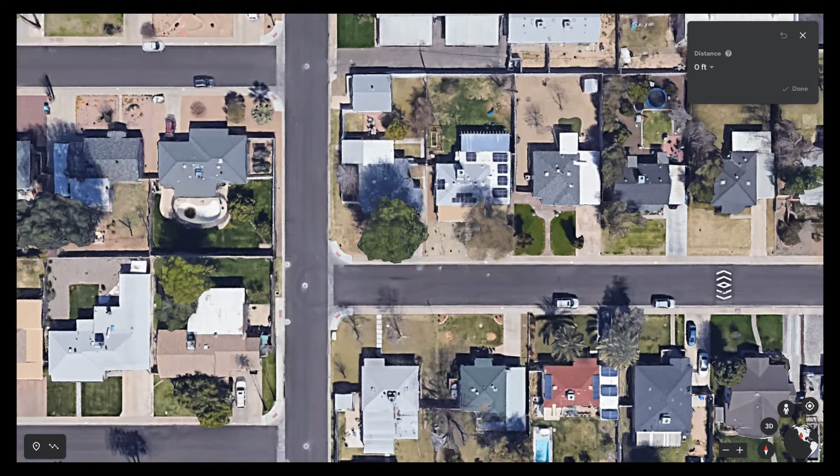We'll put that there. On the west side, it's a good 70, 80 feet as you go across that street. And to that north, we zoom up a little bit. You're still 40 to 50 feet before you hit where someone actually lives. So there's actually a kind of a unique advantage to my property in that my music room is detached from the house, and it's actually a fair distance from everyone.

I've also made an effort to not play too late or not play too early. And there used to be a renter in this property who I had a conversation with: Hey, I'm a drummer, and I like to play. If you ever have a problem, give me a call. And I had that same conversation with the new owners that moved in maybe about 2 years ago.

And I've never had a complaint about this, but I've also been a little self-conscious. And I have kind of made my own rule that I don't play before noon and I don't play after 7 p.m. And that's worked out for the last 4 years or so. But when I was looking at my space, there were a couple of very basic improvements that I thought would help improve the sort of acoustic control as well as the use of the space.

And then, as I started looking into it and doing the research, I thought, there's an opportunity here to make some significant improvements that would make it a lot easier to possibly play outside of some of those hours I had pre-established, as well as just future-proof any issues.

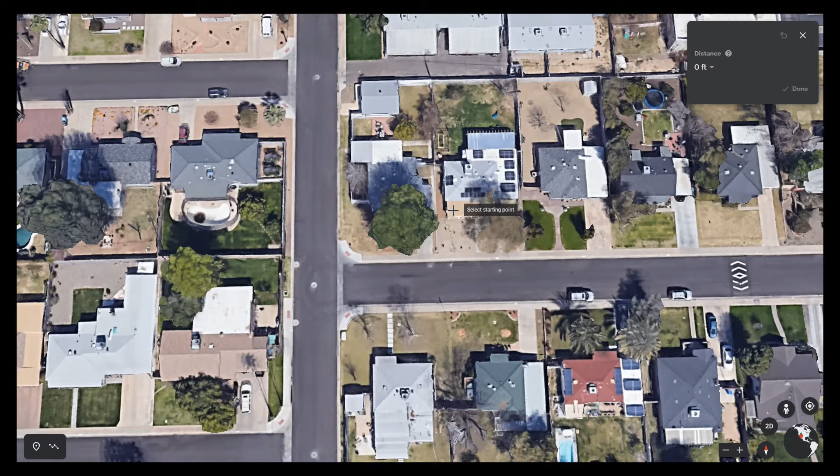So what I would encourage you to do with this is, first of all, do your research. So I'll show you a couple of books and resources that I've used in planning my project. One here is a book, How to Build a Small Budget Recording Studio from Scratch by Mike Shea and F. Alton Everest. This one had a lot of interesting information, a lot more about sort of the acoustic engineering and some of the principles. It has also a lot of information about acoustic treatment and some basic information about acoustic isolation or soundproofing.

But another resource that I thought was a little bit more pragmatic and a little bit more focused on, okay, how would I actually build something, or what are the materials that really make a difference? Or as Rod Gervais points out in his book, Home Recording Studio: Build It Like the Pros, is it the right material and is it in the right location? And this was kind of an interesting resource because it covers the whole construction set of trades, whether it's carpentry and framing, electrical, HVAC, and some of those other pieces.

And he also gets into acoustic treatment, which is, again, treating a space to improve sound inside of the space. But one of the things that I think Rod brings to the table is really that construction background. There's a lot of helpful diagrams and drawings and topics there that are, again, really pragmatic into how to physically do something.

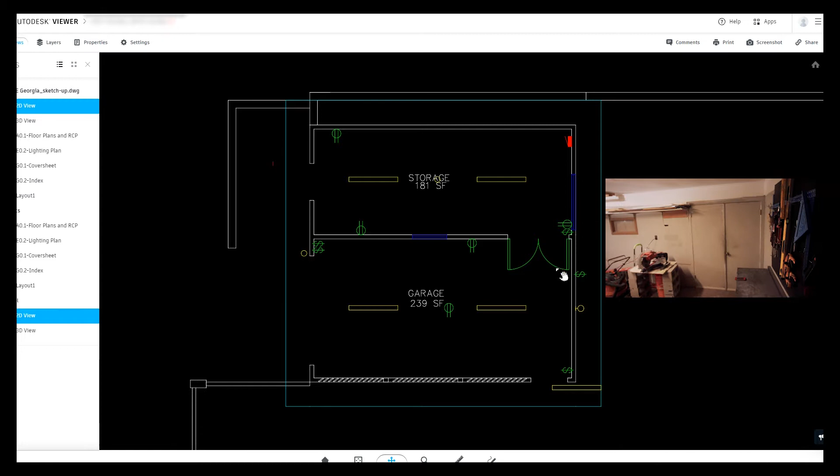And so let's talk about my garage. So we talked about my music space. My music space is here inside of this garage. It's about 180 square feet. It's very simple. You can come through here to get into the garage area. There's a set of double doors that bring you into this room. There's a window in the east wall. There's a small window in the south wall, and there's an exterior door in the west wall that takes you out into this porch area.

Inside, it's very simple. It's just a box. We've got a few electrical outlets. The electrical distribution board for the garage is located in this space. And we have some surface-mounted lighting in here. Very simple. You've seen it in a lot of my videos. But it's nice and, again, conveniently located away from the house and relatively distant from the neighbors.

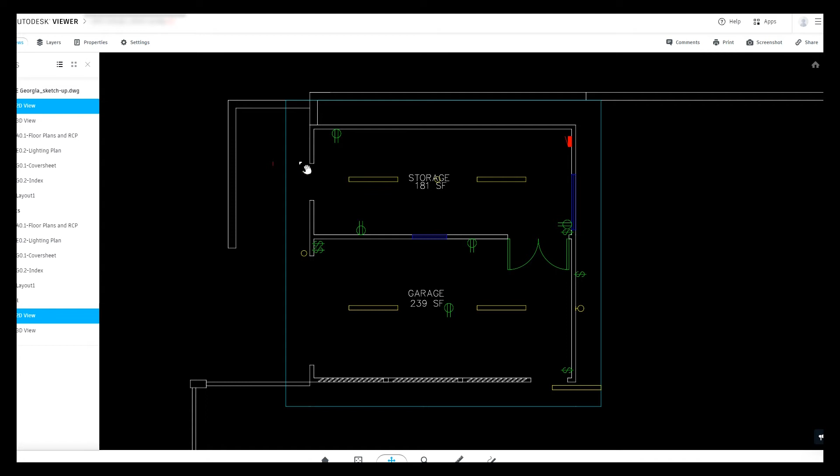As you come through this space, you come into the garage area that has a traditional roll-up door, some very basic lighting. It used to have an open slat construction on the south side. I did a project last summer to frame this all in. It's got sheetrock and some storage here, so that helped a little bit on that south side. So this is really where we're starting with in terms of the work. So in terms of planning, looking at your space, what do you have? You can start to draw it out and test ideas and see what makes sense to you.

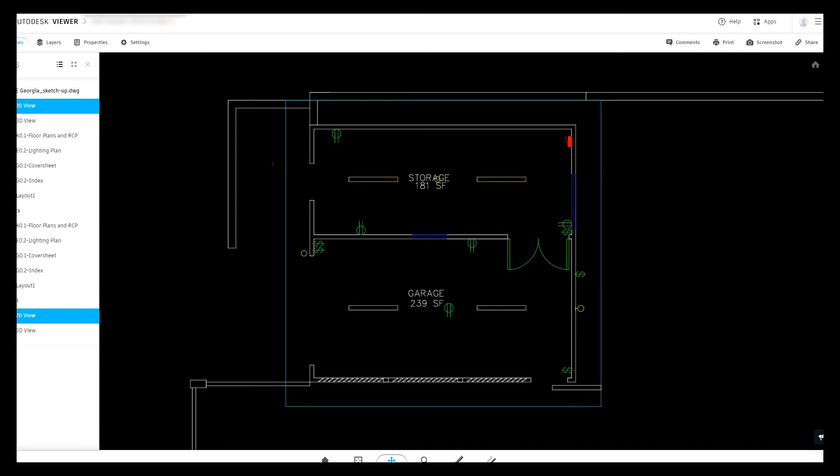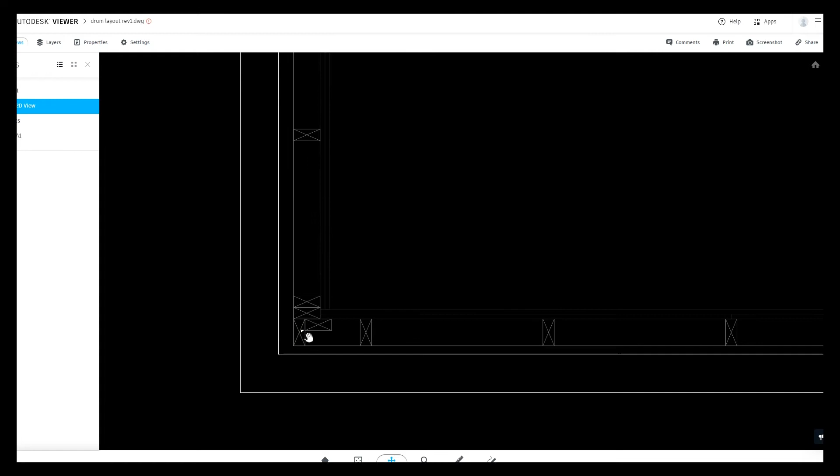So this other drawing here, same application, AutoCAD, again just working in 2D, and we're just doing line drawings or sketches. So here I can start to actually build it on paper before I try to build it in real life. The concept I wanted to do was a room within a room. And when you start looking at that, you think, okay, how would I actually do that? If I have the exterior wall, which is represented by these two lines, what is the impact of framing up a wall inside of that exterior wall? How does it impact my floor space?

Once I put in studs and gypsum wallboard finish, and I try to keep a certain distance separation from the other wall, on paper you're able to start planning out what is the actual impact and how's this going to work. And here you can see what I've actually done is, again, built it on paper first. So I'm laying out studs. There are a couple of options you can go with for stud spacing. These are for the walls.

Common spacings you'll see are 16-inch on center, 24-inch on center, and there's even 19.2-inch on center, which I've never seen. Thinking about openings, where would the door go? What sort of framing does the door need? What clearances does it need from different things, and how does that impact your space? This is a good 2D way to start thinking about it. Now, a couple things. One is not everybody has access to AutoCAD, although there are some freeware versions, but almost everybody has access to pen and paper.

Even if you don't want to do it on a computer, you can look at laying things out and testing ideas, although that can be time consuming. But one tool I would highly recommend for everyone to look into is SketchUp.

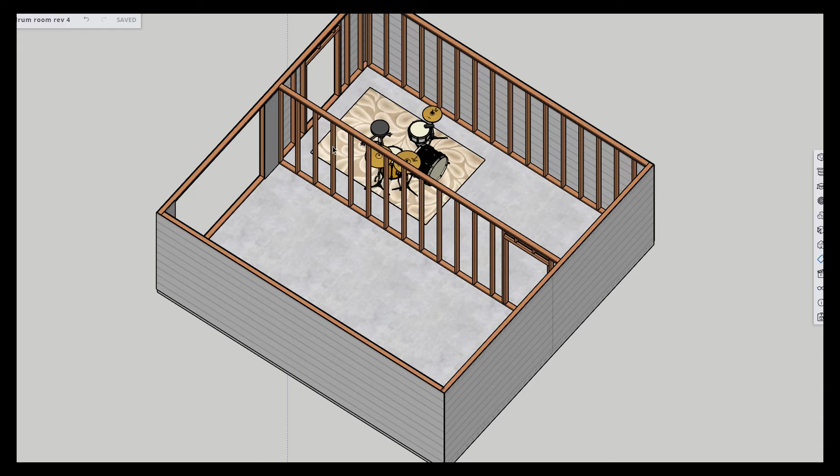SketchUp is very similar to AutoCAD in that it allows you to draw things, but this is essentially a 3D modeling software, and it's incredibly easy to use and very intuitive. Now, there is a free version you can get online. SketchUp has moved to sort of a paid version that you can access online, and that's what I have. But the free version is very similar to the paid version, and I think most basic projects could probably get tested and modeled using the free version.

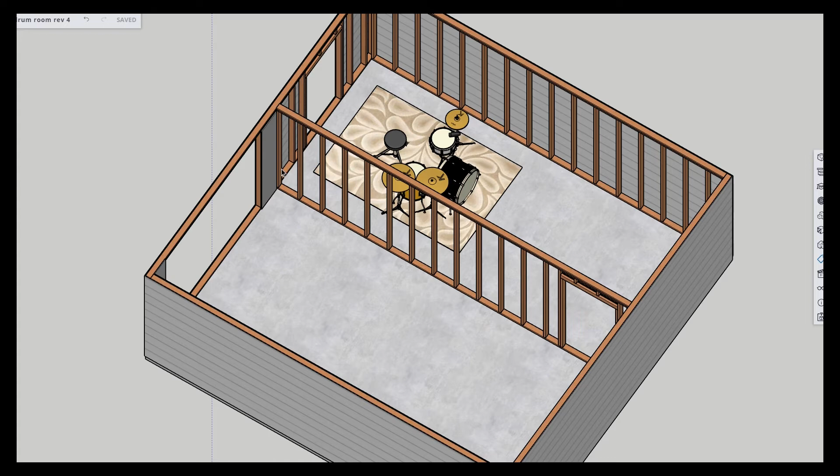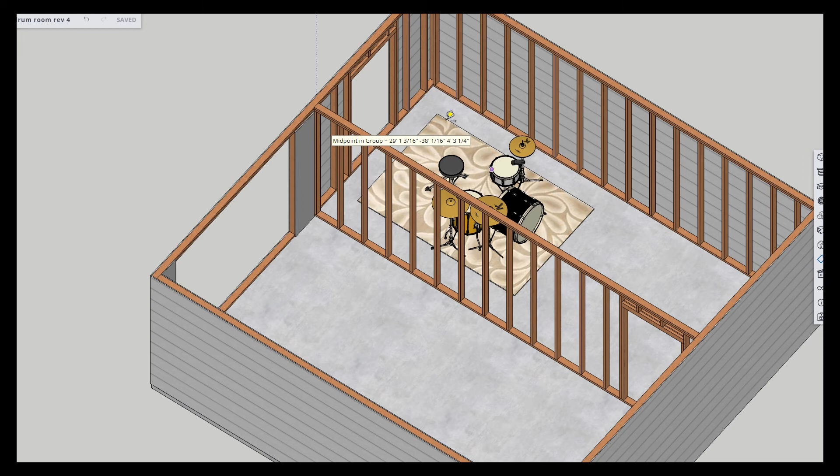But what you have here is that same concept of AutoCAD in the sense I'm doing drawings, but I'm actually doing this natively in 3D. This is a model that I can move around, I can test, I can measure different distances between elements, I can check things. There are ways to, again, build this on paper, or here, build a model before you get out to site.

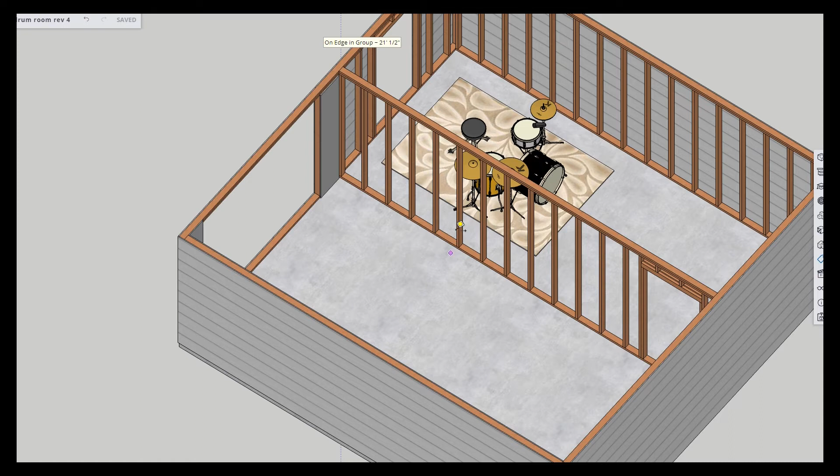And I've taken time to actually do just that, in the sense of, this is a stud, this is where it goes, this is the distance it's going to need to go from the next stud. Where's the wall plate, bottom plate? How do the top plates sit? How do the two top plates mate with each other? Those sort of things. And what that does is it allows you to test ideas and to see what something's going to look like before it happens.

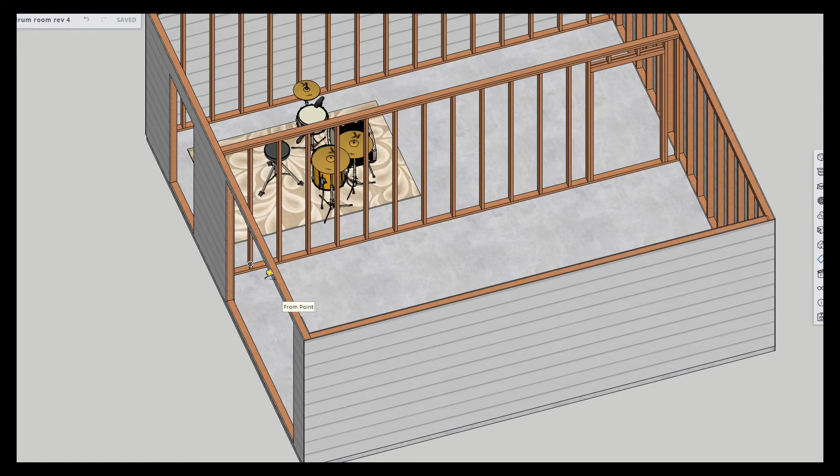Now, what this is representing in this model here is kind of what I have already. So I didn't model everything. I didn't bother modeling the existing exterior door where you walk into the garage. This is the garage door, roll-up door that's here. This is that existing exterior door in the west wall. I didn't bother modeling the windows because I'm actually going to be removing those. So I'm starting with this. This is kind of what I have.

I threw a drum set. Look at that. That's pretty cool, right?

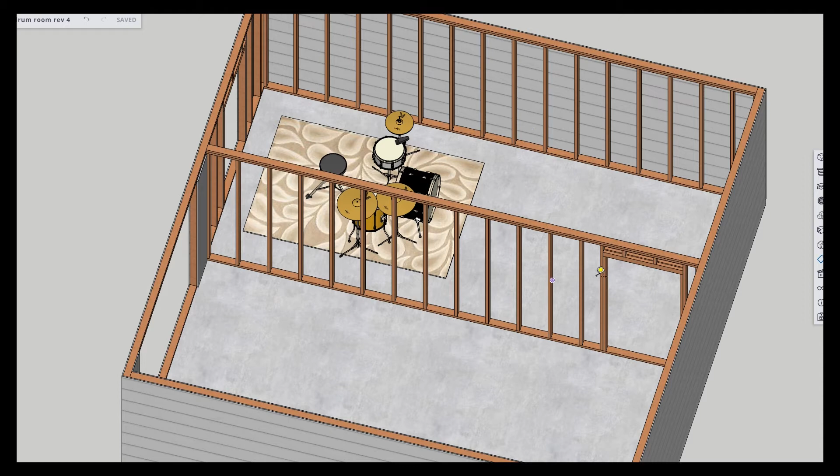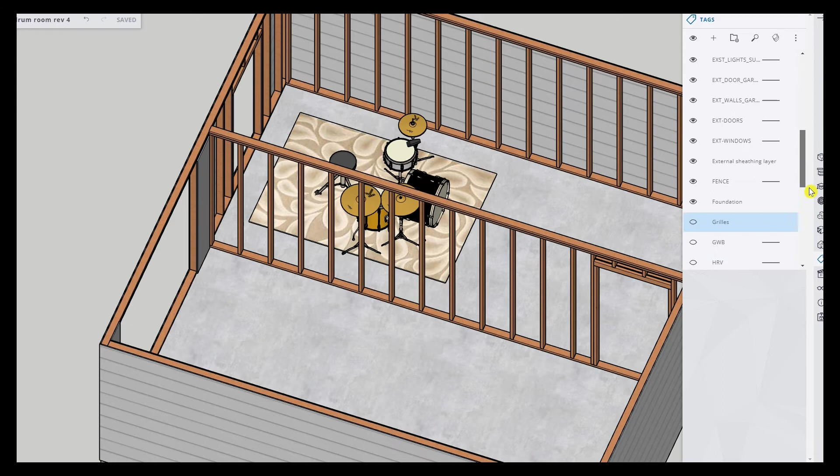I threw a drum set right in the middle there just to kind of give you some concept of space. So this is what I'm starting with. And again, I'm a very visual person. I love the fact this is very visual, very easy to look at, to test, and actually using this software is super simple, okay? So if I'm starting with this, let's say, okay, well, that whole idea of building a room within a room, what is that going to look like? So let me pull up, so that's what I've done.

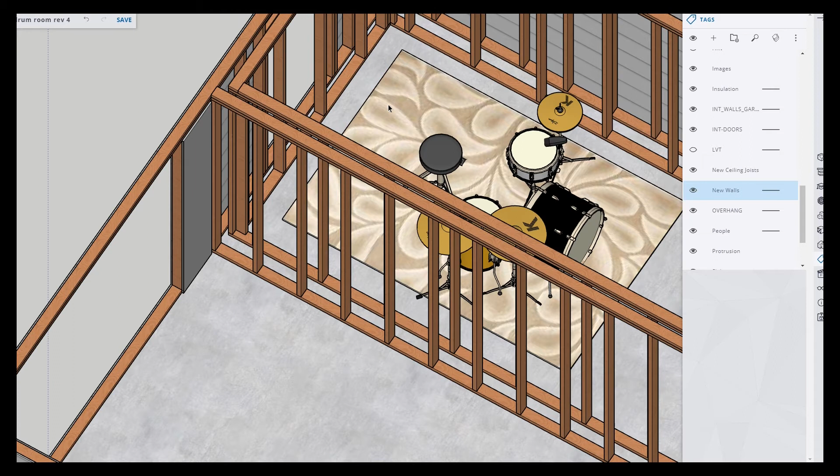So here in my SketchUp model, I've gone in and I've framed every member of my new wall. So this is an existing wall that comes through here. And this is where we're going to be building this second wall, which is to help isolate the music space from the rest of the building. And the existing framing is 16-inch on center, which is pretty common. This is a load-bearing partition. The ceiling joists rest on this wall here.

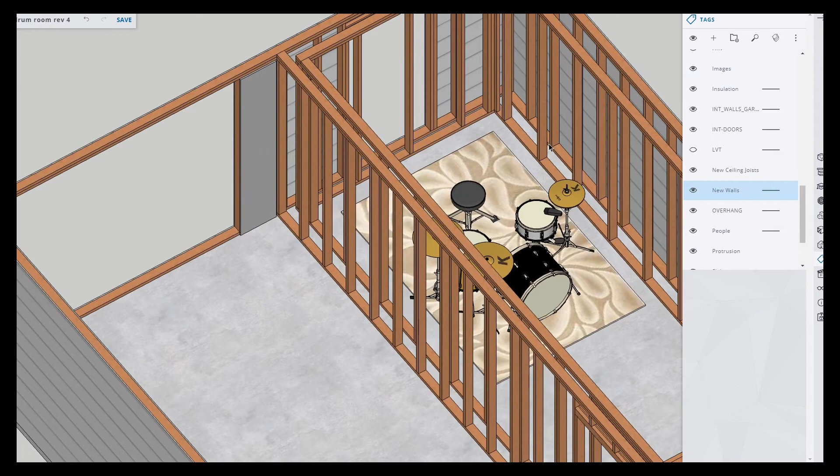My new wall is going to be framed at 24-inch on center. That's done purposefully for a couple things: it's less framing for cost, and also in terms of acoustic response, less framing provides better isolation. Because there's more of an air gap or insulation that is helping prevent sound migrating from this wall construction through this gap to the next wall construction. Each one of these pieces of framing is essentially a short circuit where that sound can excite the mass and travel through that other mass.

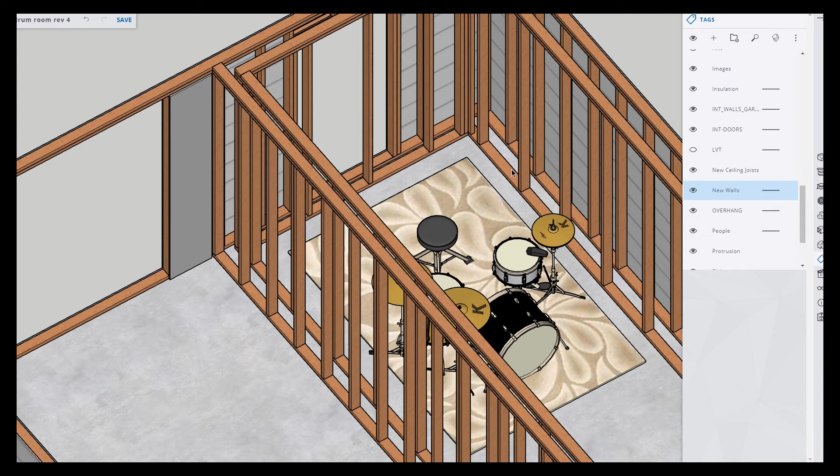And really this whole concept of the room within a room is sort of the mass spring mass concept. You've got to have a mass wall, a spring, which is this airspace in between, which also has insulation inside these stud bays, and then a mass on the outside. And really that's kind of the key, and what you'll see in Rod's book, and you also see through a lot of tutorials. Don't be fooled by products that say they'll magically reduce noise in terms of acoustic control. There's a big difference between control and treatment, but in terms of acoustic control or soundproofing, mass is literally almost the one thing that will do it.

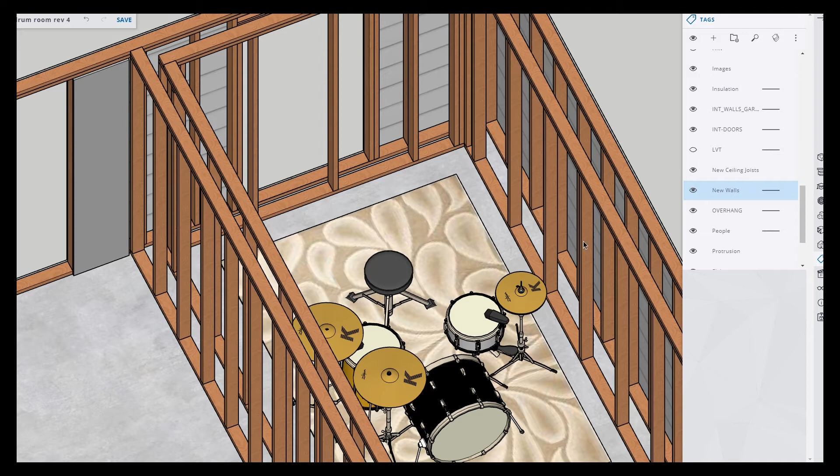You can't magically put egg crates on this wall and expect that you're going to prevent sound from traveling through this construction. So again, in terms of planning here, I've built literally every 2x4, and I can build it in this model before I ever start on site.

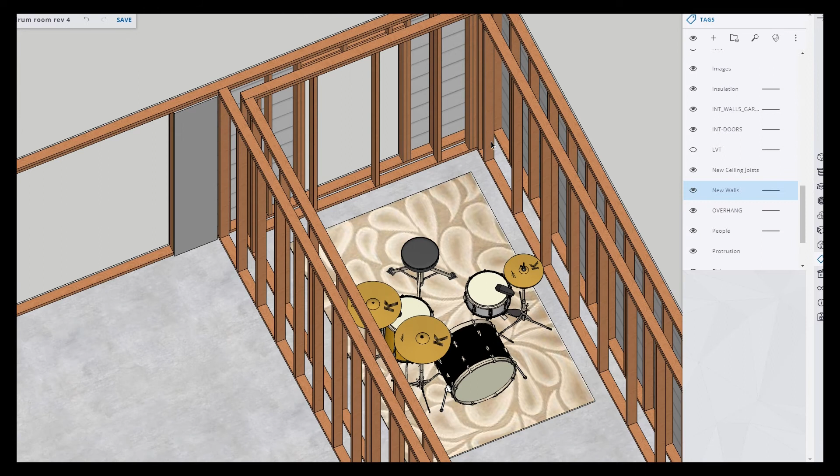So we talked about a room within a room. We have walls framed up here, 24-inch on center, and they are on the existing concrete slab. Now, one thing I did look at a long time ago was some concepts where I would build a floating floor.

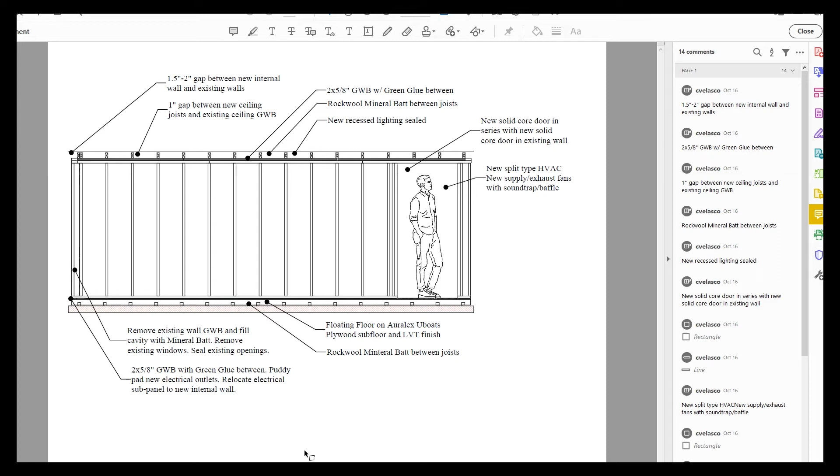What I have here is my original concept, and I'll just show you this in 2D. Again, I used AutoCAD to draw this. My idea is very similar to my current design, but the difference is that in this design I actually added a floating floor, and that floating floor would be another way to help isolate the room within a room from the slab. And I'll show you another set of images that make this a little bit easier to follow.

This is my original concept, and you start with the current space that we have, and this is my idea for the floating floor. I looked at a couple of different constructions, I watched a lot of YouTube videos, I read some books, and essentially this would have been a framed floor that would sit on rubber isolators. This specifically was going to be a product by Auralex called U-Boats, but essentially they provide an isolation for that floor framing from the existing slab.

And then inside of that I would put rock wool insulation, with the purpose of helping isolate the room within a room from the existing slab. Now this is a lot of construction, a lot of materials and a lot of cost, especially these small isolators. There's a couple different products and approaches, but these specific ones weren't cheap, $3 or $4 each.

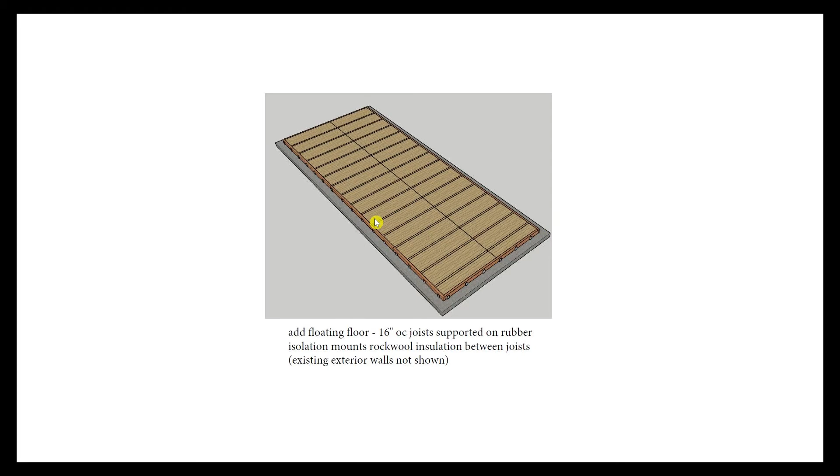So one big thing was in Rod's book, it really talked about floating floors, and to sum up his conversation, you will never get enough mass for it to be effective, especially in terms of lightweight framing. And if it's a slab on grade, this doesn't make any sense. There's not enough mass, and in some situations this can actually make it worse, because you essentially create almost like a drum, and there's some complications here.

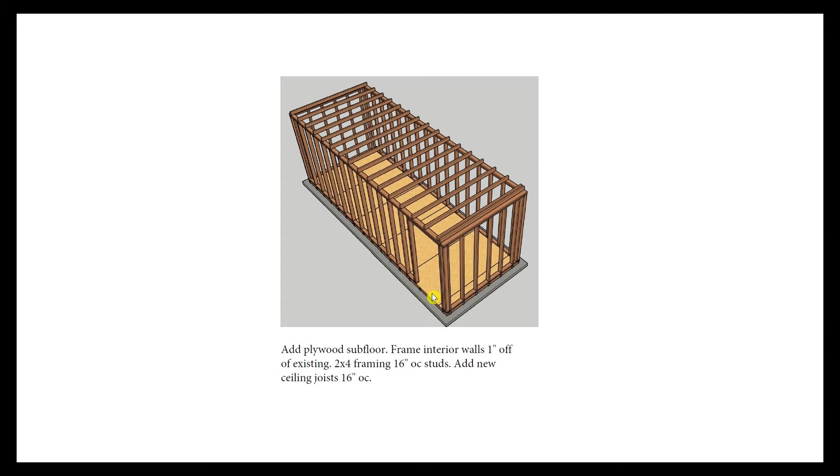So again, going back to my original idea, you'd have that floating floor, you'd frame up your walls. I even looked at doing 16-inch on center internal framing, and you would have your floating floor, you'd put your subfloor on top of that, and then whatever floor finish you want. I was going to put an LVT product, and I'll leave that there.

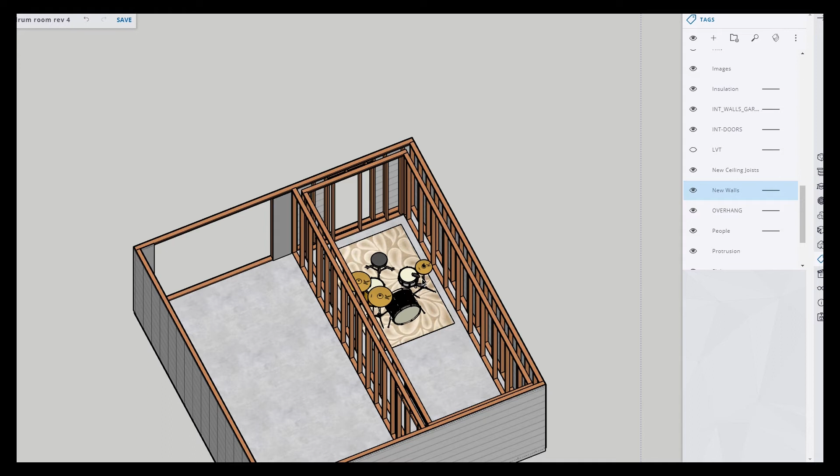So that's one big difference between my original set of ideas and my current set of ideas, especially influenced by Rod Gervais's book and some other research I've done. I think YouTube is a great resource, but it's also full of homebrew and maybe not completely valid approaches, and some great ideas, but seeing it in print by an experienced studio designer is a lot more reassuring than someone's YouTube video. And I understand the irony in you watching this video.

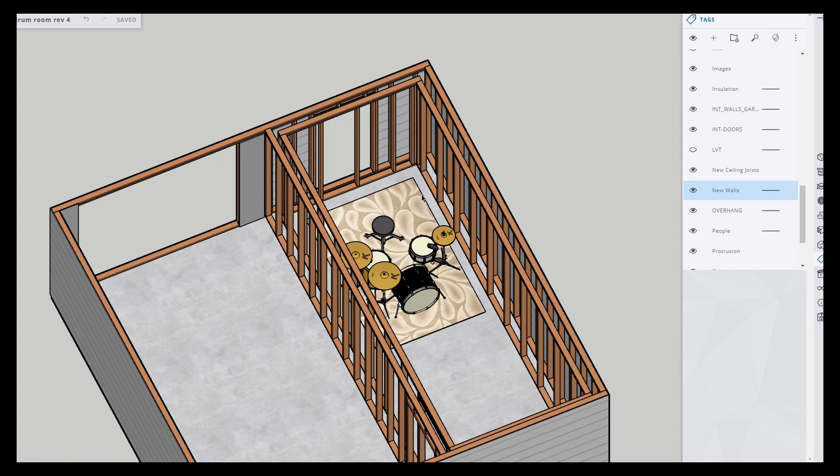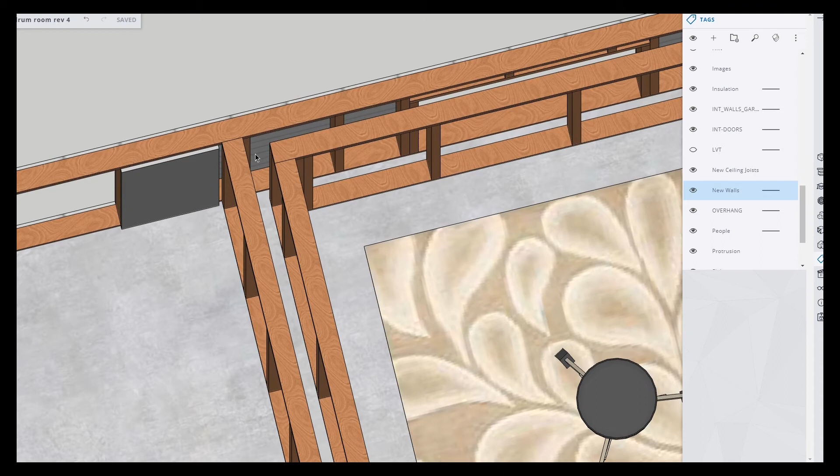So again, I just want to present these ideas. That's a long introduction to say my intent is for the room within a room to be installed on the existing slab. Okay. So now we've built the walls, 24-inch on center. There's a gap. It varies, but it's between 1 inch and 2.5 inch. Obviously, there's no finish shown on anything right now, so it's about that. But these are physically separated from each other.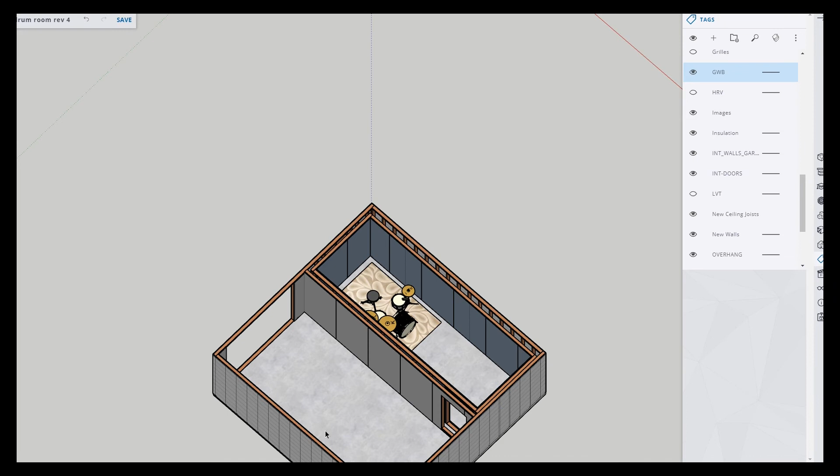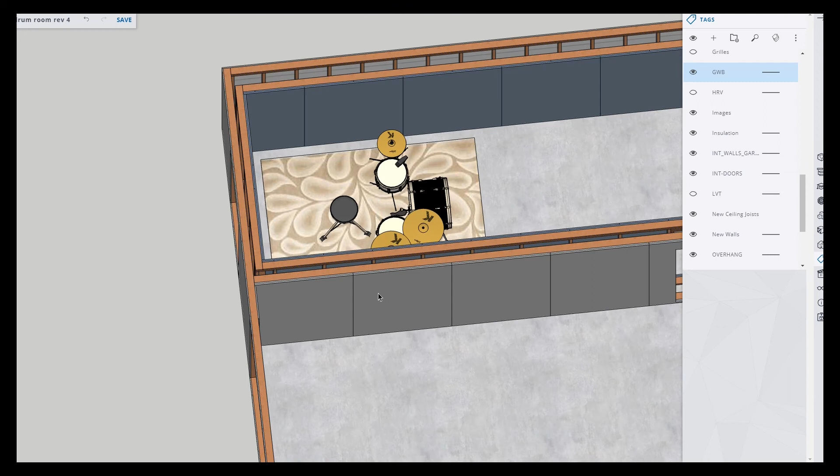So I'm going to start with the sheetrock here while we're still on the walls. Inside the garage, I'm actually going to demo, because I replaced this wall essentially, this sheetrock here, clean this up, and remove the window there because I want to add insulation. There's no insulation in this wall right now, so that comes off, and I'll be replacing it with 2 layers of 5/8 inch drywall. And on this garage side, it's just going to be that. I'll get to the inside of the music room in a sec.

And I'm going to replace that same sheeting on this wall. By this point I would have replaced the sheeting on 3 out of the 4 walls, and there's not much wall on this side because of the garage.

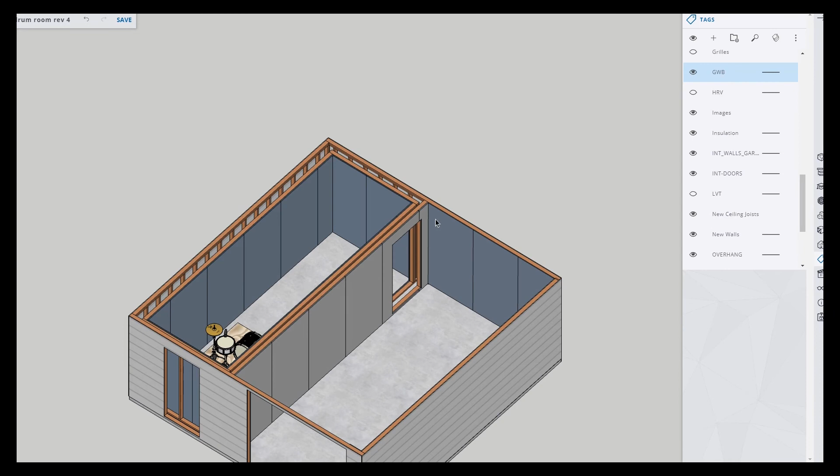So I thought, you know, I want to clean this up, and there's a couple things I want to do, clean up the electrical and stuff. So I'm actually going to pull this sheetrock off and do this. But this is just going to be a single sheet over here. And I don't even think I'm going to insulate this. So, okay, that's these existing walls and how we're going to do a little bit of modifications to it.

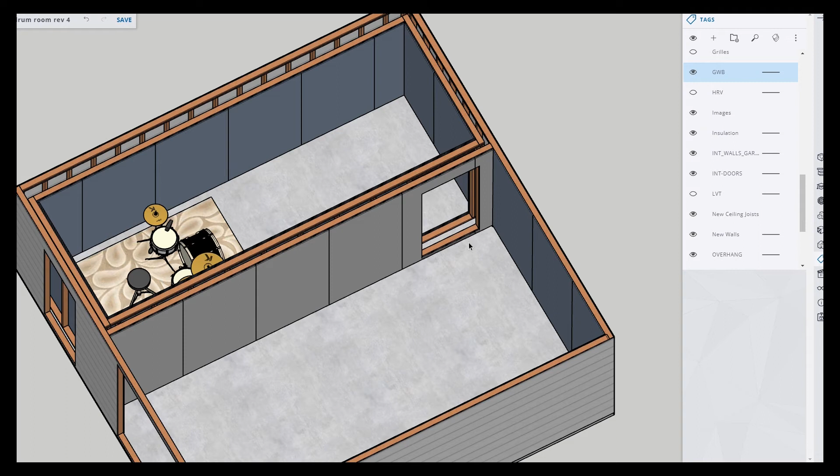One of the things also is that in terms of that double door, what you'll find, and you'll see in the books and in a lot of tutorials, is obviously doors and windows are real leaky sources in terms of noise control. So although the double door concept is beneficial for moving large things in and out of this room, I just don't think it's worth it. So I'm going to frame it in for a single door on the existing wall. And you'll see it'll be a door here.

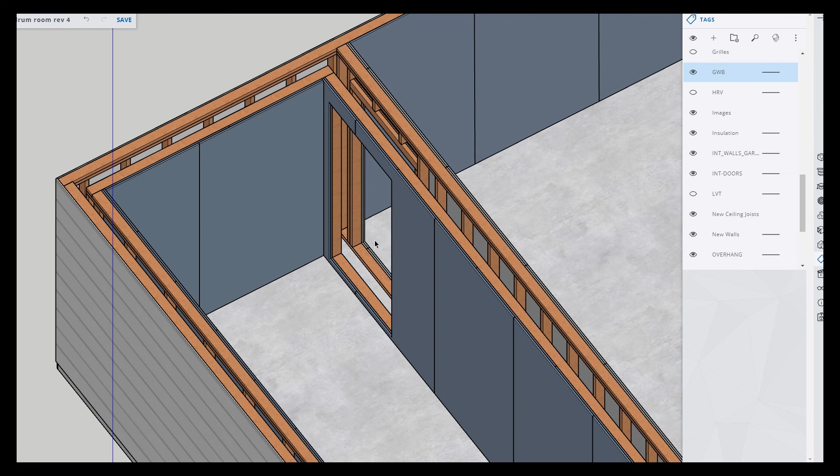On the inside, in the internal room within a room, there will be another door. So you're going to have a double door setup. And you'll see that throughout the resources, you'll see that all over YouTube. It's quite common with room within a room. Really in Rod's book, there's two big approaches. You could have one massive door, or you could have the two separate doors. And there's some details there.

But inside here, we're going to have the new framed wall, and I haven't modeled it, but I'll talk about insulation here in a second. On the finish here, you're going to have two layers of 5/8 inch drywall. The seams are not going to be lined up with each other. As you can see, this detail here is modeling where the seams are, and they're staggered. This will all be acoustically sealed using a purposeful sealant throughout, and then two layers of 5/8 inch drywall, and in between those layers I'm going to put the green glue.

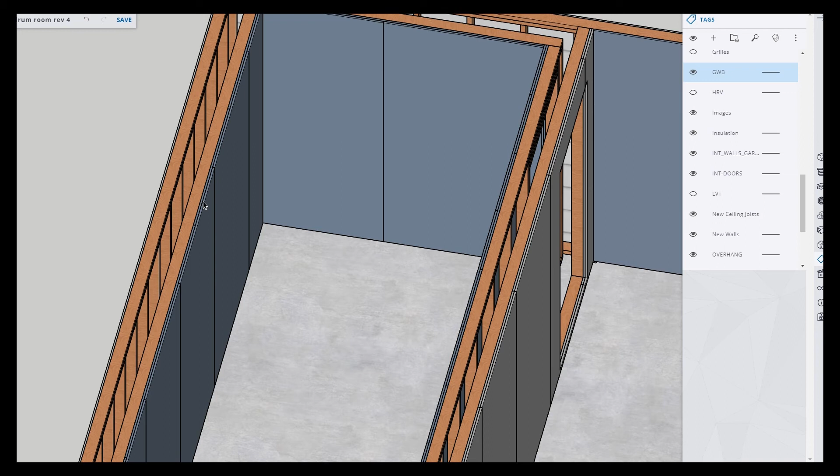And green glue, you're going to see tons of videos and resources on that. That's essentially a compound that never fully dries. It is intended as a dampening material. So the idea is that as sound waves strike this construction material, they vibrate this material. That physical vibration gets dampened by the green glue that's in between these two sheets of drywall. That mechanical energy is converted into thermal energy, which is absorbed by the wall. And again, it's a process to help prevent sound from escaping this construction.

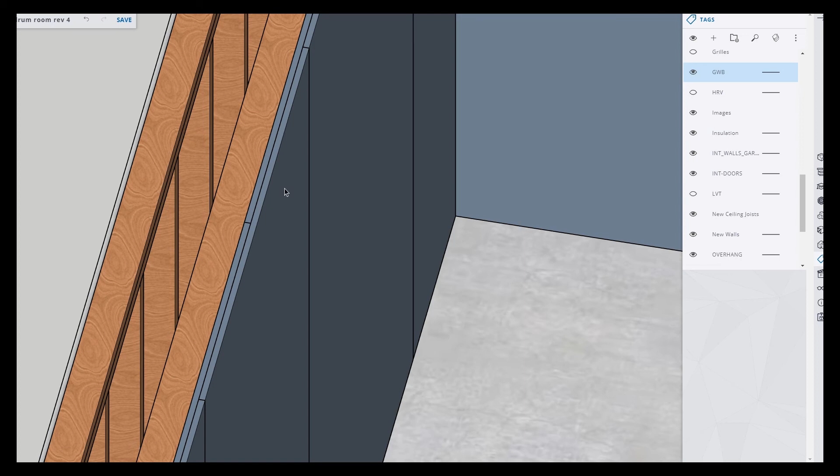Green glue is not cheap, so I've been looking into that and reading some more resources. But essentially you have a sheet of drywall, green glue, another sheet of drywall, your framing, and then in this stud bay, let me turn this off here a second. In this stud bay here, this is the existing, air gap, new. In the existing, we're going to put up an R15 mineral wool product. Then you're going to have an air gap, and then we're going to have the Rockwool Safe'n'Sound batt inside the stud bays in the new construction.

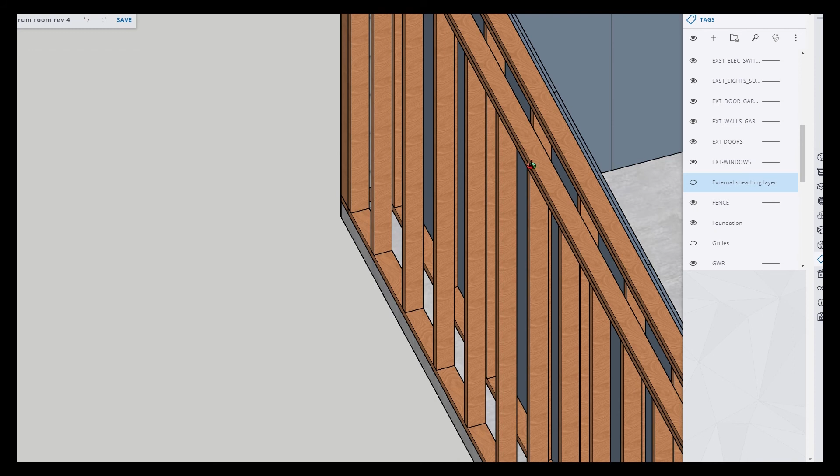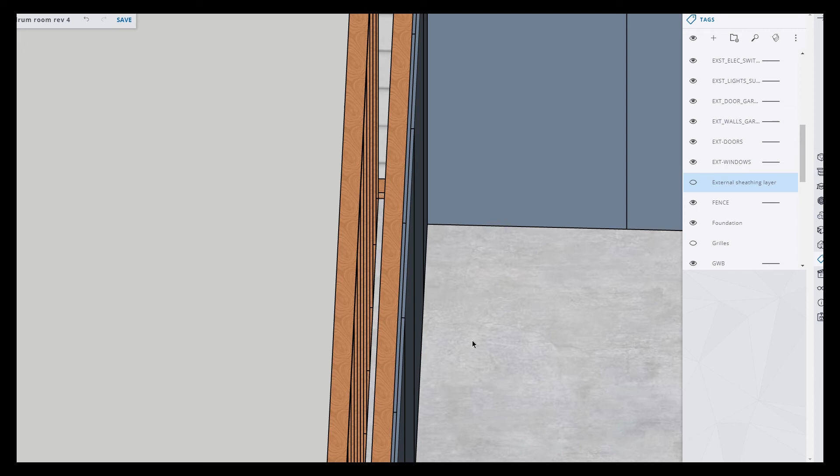So you have exterior cladding, which will take effort to go through and seal up as best we can. We're going to add R15 mineral wool. There's an air gap, and then you hit Rockwool Safe'n'Sound in the new wall. Then you have two sheets of drywall, and in between them you've got green glue. So effectively, this is a 3.5 inch plus a 2 inch plus a 3.5 inch. You're at about 9 plus the exterior cladding, so you're getting up into the 10, 11, 12 inch range in terms of overall wall thickness. And again, with the mass-spring-mass concept for that.

That's the sort of floor, the walls, and how the walls relate to the exterior walls. And then let's talk about the ceiling here. So the ceiling, again, is going to be independent from the existing ceiling. The existing ceiling, there are ceiling joists that come across, they overlap here at this load-bearing partition. Up in the attic, space is minuscule. There's just a little bit there, not a lot.

But down below, the new ceiling joists will bear on the new partitions or the new walls, room within a room. You'll have new ceiling joists. And then on top of those, and I won't show it because it would just cover all this up, you're going to do a very similar construction technique for the ceiling. So you're going to have your 2x4 ceiling joists, 2 layers of 5/8 inch drywall, and then green glue compound in between those sheets of drywall.

And then above, in the space between the new ceiling and the existing ceiling, will be Safe'n'Sound, rock wool Safe'n'Sound. Now, in terms of existing construction, you have a single layer of sheetrock attached to existing ceiling joists that bear on these walls. And then above that, you have blown-in insulation in the attic.

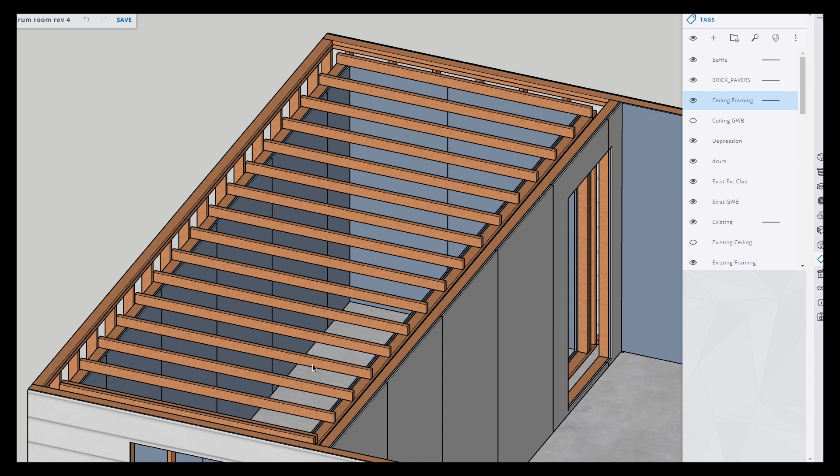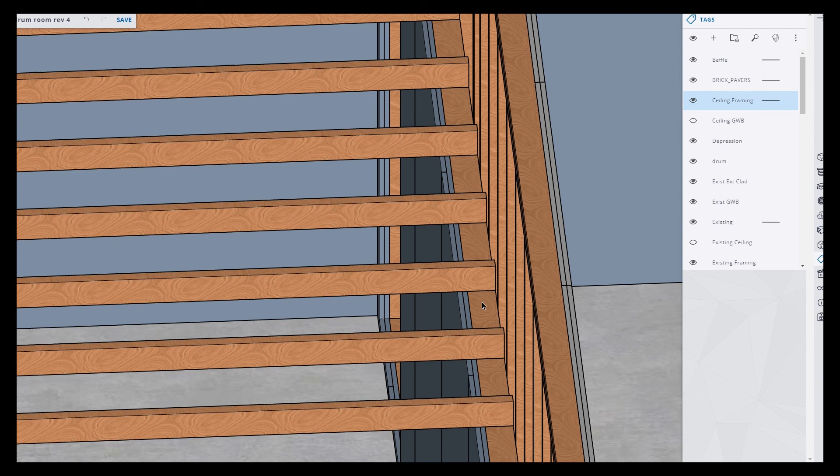And that idea was to reduce the impact of a bit of a drum effect, where you have 2 rigid layers too close to each other and the overall construction becomes a bit of a drum. Rod talks about that a little bit in his book. One of the big things I talked about at the beginning of the video was that it's not only about the right materials in terms of mass, but also where they're located. And what Rod showed in his book was you actually get a better overall performance if there is no drywall on the inside face of this new wall.

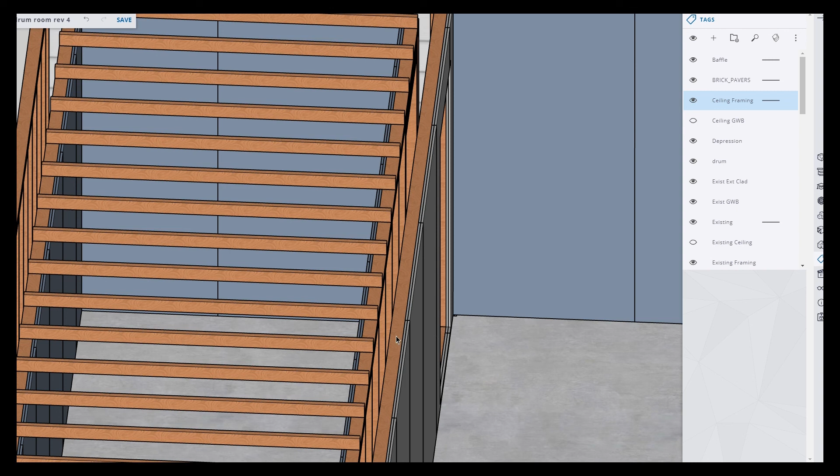So you go from mass, spring, mass, as opposed to mass, spring, mass, spring, mass, because of the proximity between those rigid layers. You get a lower sound transmission class, which is a general metric for evaluating the effectiveness of reducing sound transmission through a wall construction. You actually get a worse one by putting the sheetrock in here. And that situation is what you end up with in the new ceiling. You have your new drywall for your new ceiling, a space, and then the existing drywall, and that kind of mimics that lesser performance. But in terms of constructability, it's probably a better approach for me.

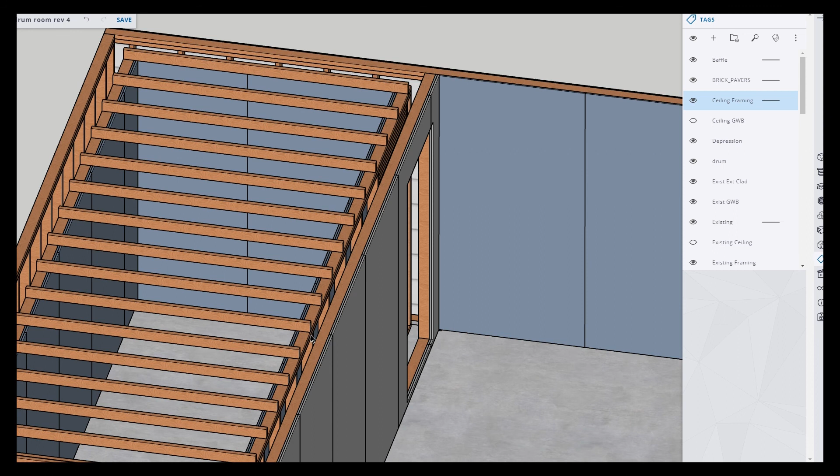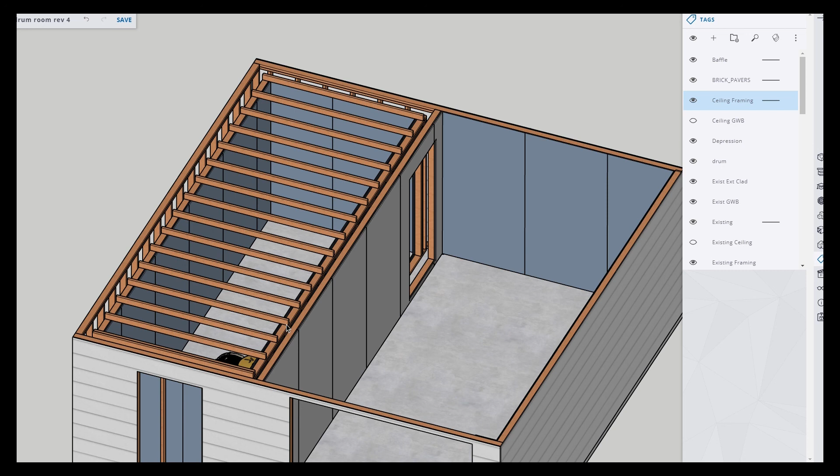And what I highly encourage is that you're thinking about that before you ever cut a hole, before you ever cut a 2x4. Building it virtually is going to save you time, effort, and you can see where the potential mistakes are or where things need to be detailed before you ever get to site or start spending money or messing with stuff.

Okay, so we went over the framing here, the wall. I'm going to actually turn off that ceiling framing. All I'm going to show on the floor here is we're going to put down a kind of 3-in-1, which is a vapor barrier and a little bit of insulation, and then I'm going to put in some LVT flooring.

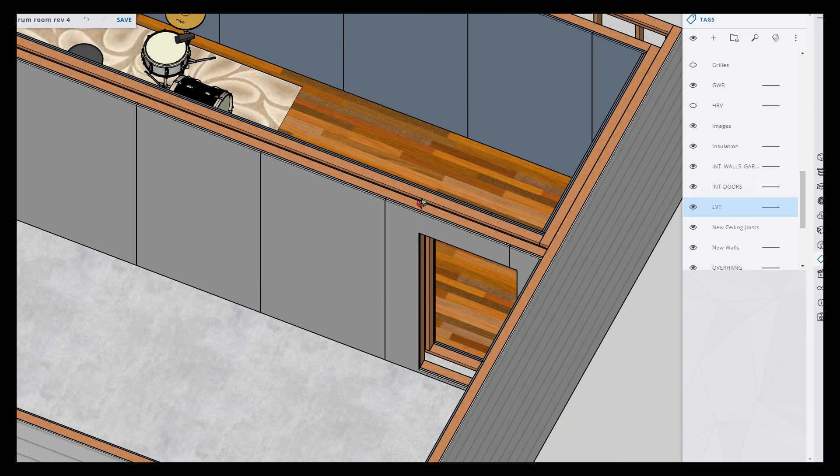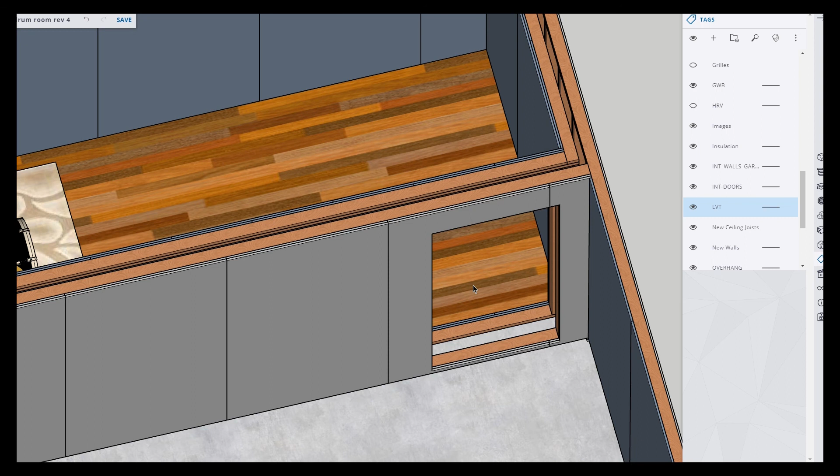I haven't modeled it, but essentially you're going to have the 2 doors here to help separate, and there's a lot of devil in the details when it comes to doors. I don't think I'm going to cover that because I haven't modeled it, but I think Rod's book is really helpful with that, and there's a couple of YouTube series that are real helpful with some ideas here. But most of all, what you'll see is the big effort is in preventing any sort of air passage between these spaces.